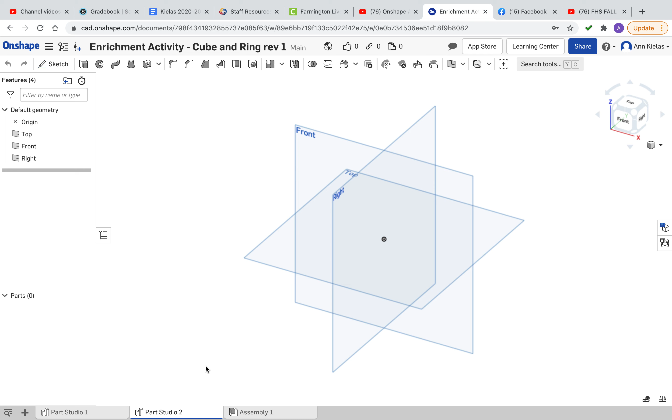In this new window, I'm going to also work on the top plane. I'm going to make a sketch. I'm going to make a rectangular object on the top plane that is 2x2x1. So it's not really a cube. 2x2x1, 2 enter, 2 enter. Click the tick.

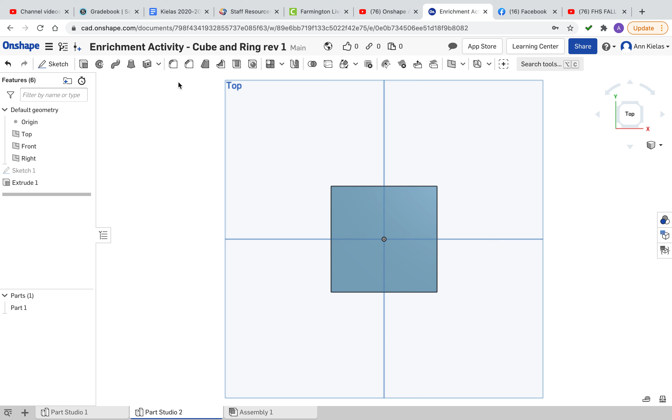Now I'm going to extrude that 1 inch thick. So it's another new extrusion, unlike in the other video, because this is in a separate drawing, I don't have to add on. I'm going to make it 1 inch thick, and I'm also going to make it symmetric. All right, I'm clicking the tick. Now I've got this shape.

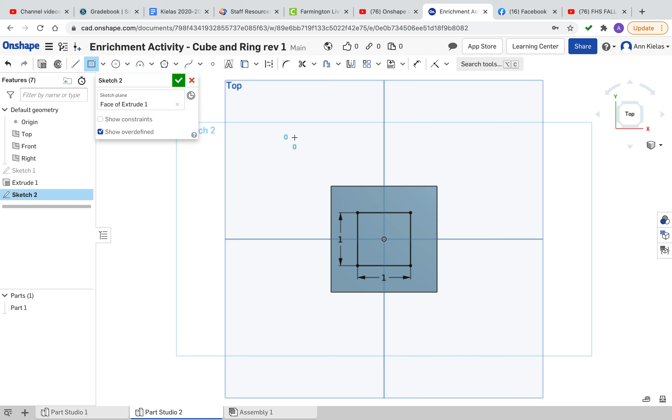I'm going to go back to the top, and I'm going to extrude a cube in the middle of it on this top sketch plane that is 1x1x1, but I'm going to remove material. So making a 1x1 square, 1 enter, 1 enter, and I'm going to escape to not make another square. I'm going to hit that tick.

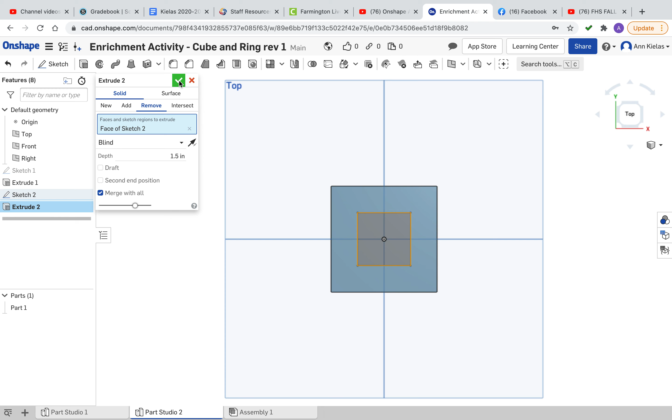Now I'm going to extrude just that center. Instead of adding material though, I'm going to remove material. I'm going to click merge with all. I'm going to make it a little more than 1 inch because I want it to remove all the way through. And I'm going to click the tick. You'll see that I made a place that's the same size as my other cube.

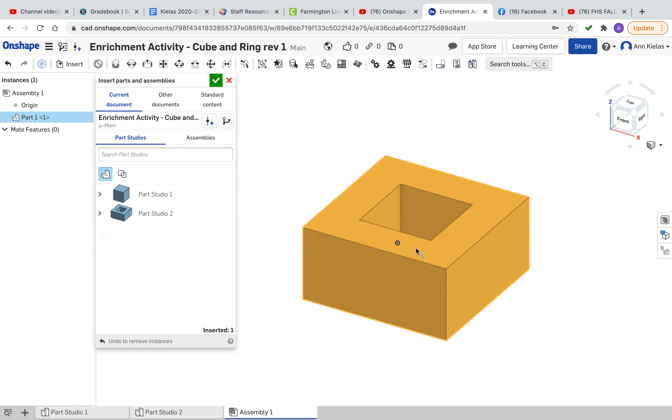Now I need to make an assembly. So I'm going to click on the assembly button. And it brings up this new menu, and you see that it's blank. To bring in parts, I'm going to click on Insert, and I'm going to bring in this part first, and I'm going to zoom out a little bit to make it not so big, and then I'm going to bring in this part. It doesn't change the size of the part when I do that, it just zooms it. Okay, click my tick.

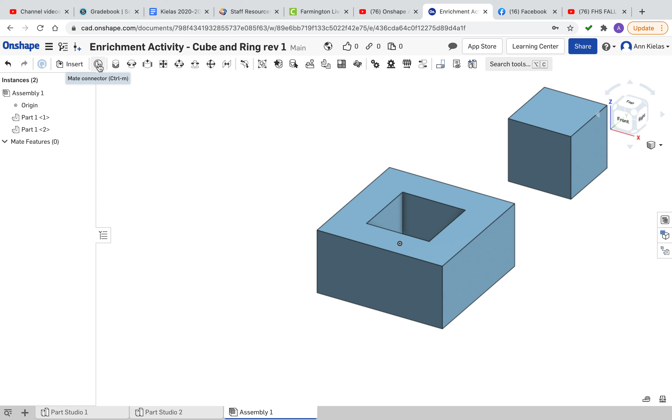So the little blue thing in the center points down, and then I'm going to click the tick. I'm going to do the same thing, click on Mate Connector, and I'm going to do the same thing at the center of this one, and I am also going to switch that little blue pointer to going down.

The next thing I want to do is mate or connect them. So there are various choices on this toolbar for the ways that I can connect things. The first one here is called fastened mate. If I wanted to put these two things together permanently, so they wouldn't move again, I would use that one. This one is revolute mate, it would rotate in a circle. That's not going to work with two square parts. If there were two round parts, like if I was making a fidget spinner, I could totally do that. But in this case, I'm not going to.

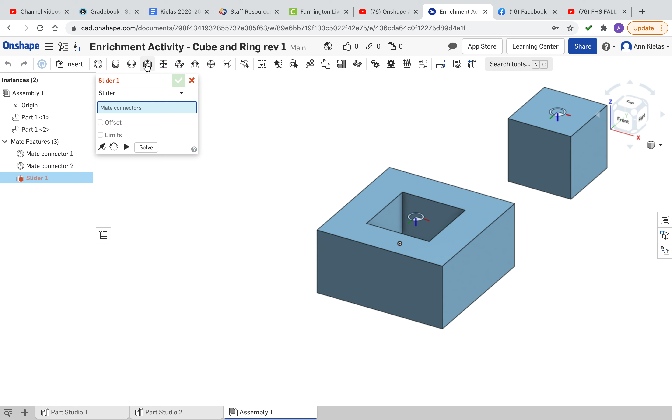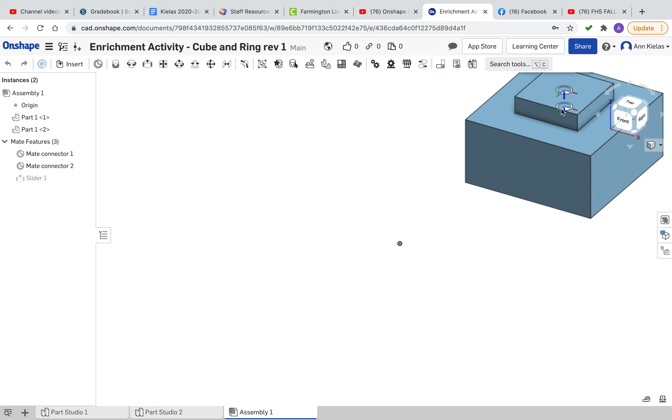And then the last one is called slider mate. That's the one I want because I can put these two things together, but I'll be able to slide the two parts up and down. So slider mate, I'm going to pick this one for my first mate connector, and I'm going to pick this one for my second mate connector, and they are together. I'm going to click the tick, and you can see they're together, and I can move this up and down, moving my part over a little bit too so you can see it. So I can still move it up and down, but they are together.

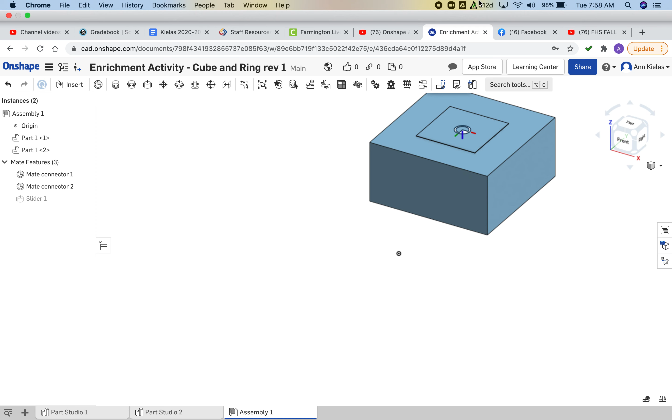So that is your challenge today. I challenge you to make these parts and mate them together. If you have any questions, I'm here to ask, but I'd like you to try to do this on your own a little bit while I help the students that aren't finished with their Onshape drawing. So this video will be here for you to do this with. It's an enrichment activity, but something for you to work on today to help you go a little farther in Onshape.